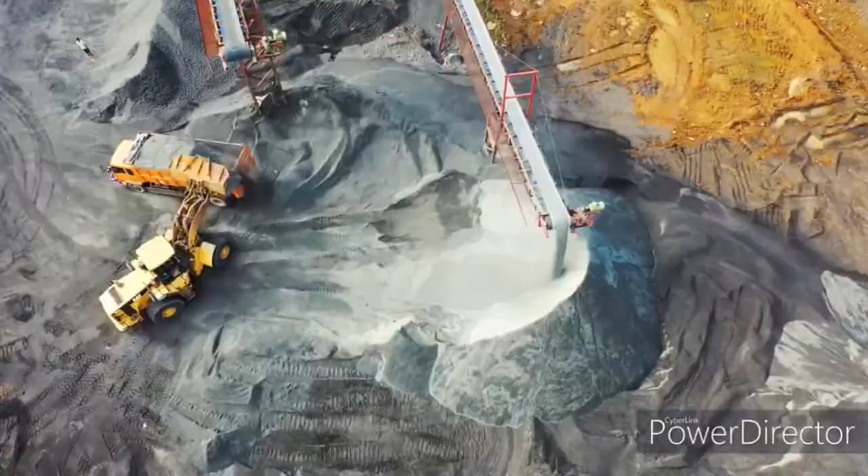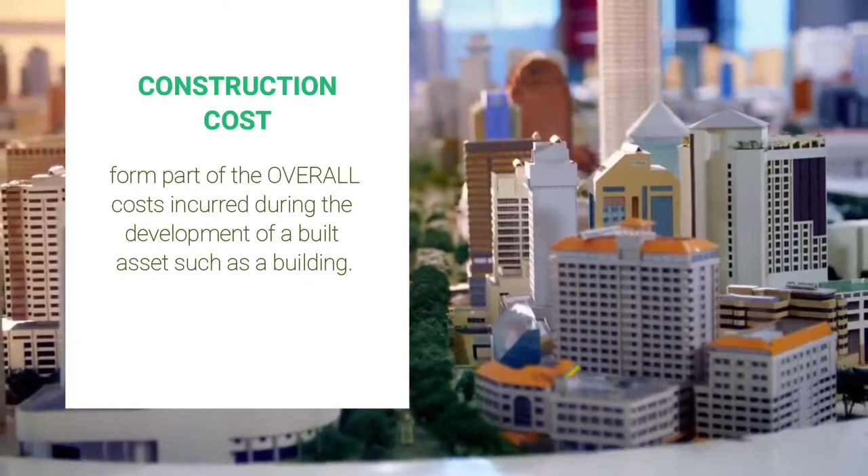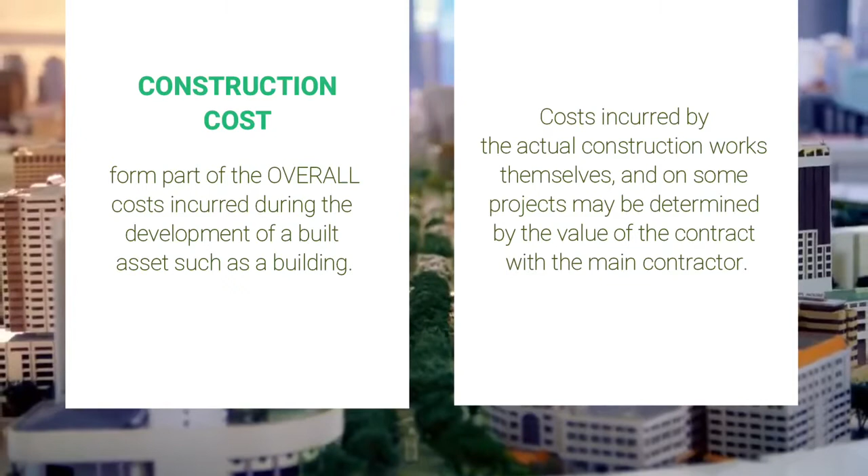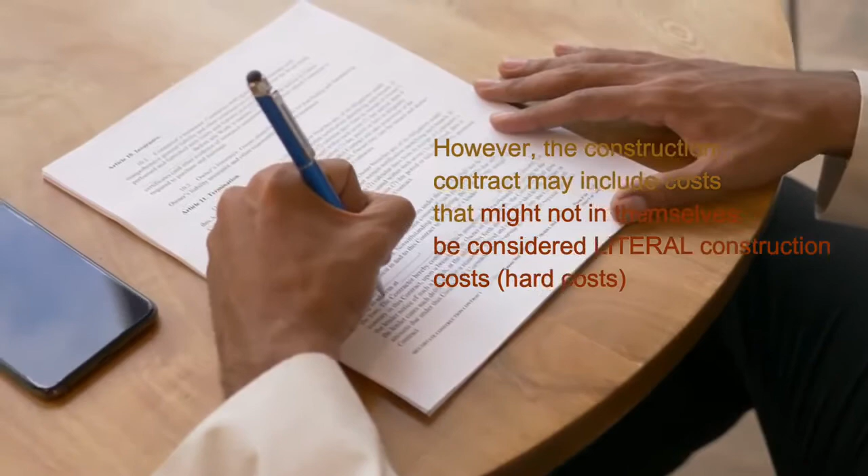Construction costs form part of the overall costs incurred during the development of a built asset such as a building. Those costs are incurred by the actual construction work themselves, and on some projects may be determined by the value of the contract with the main contractor. However, the construction contract may include costs that might not in themselves be considered literal construction costs, such as fees, profits, overheads, and so on.

Many projects will also include costs that is not possible to determine when the construction contract is awarded, such as prime cost sums and provisional sums. And there may be construction works that are awarded by the client outside of the main contract, such as fitting out the interior, minor alterations to the completed works, installation of equipment, and so on.

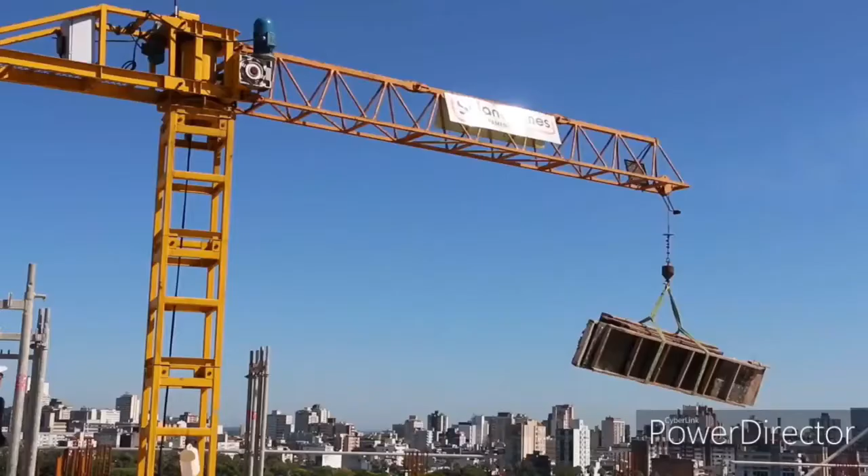In addition, the contract is likely to allow for the contract sum to be adjusted as a result, for example, of variations to the works, claims for loss and expense, or fluctuations. It is because of these unknowns that clients are advised to hold a contingency.

As a result, what is considered the actual construction cost of a project must be clearly defined and may not be finally determined until well after the actual construction works have been completed. This is true even if a contract is described as having a fixed price or guaranteed maximum price.

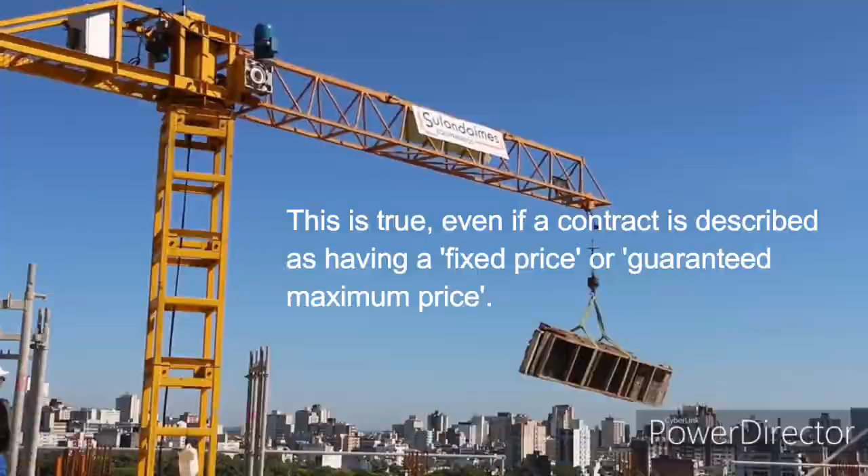Cost plans evolve through the life of the project, developing in detail and accuracy as more information becomes available about the nature of the design, and then actual prices are provided by suppliers.

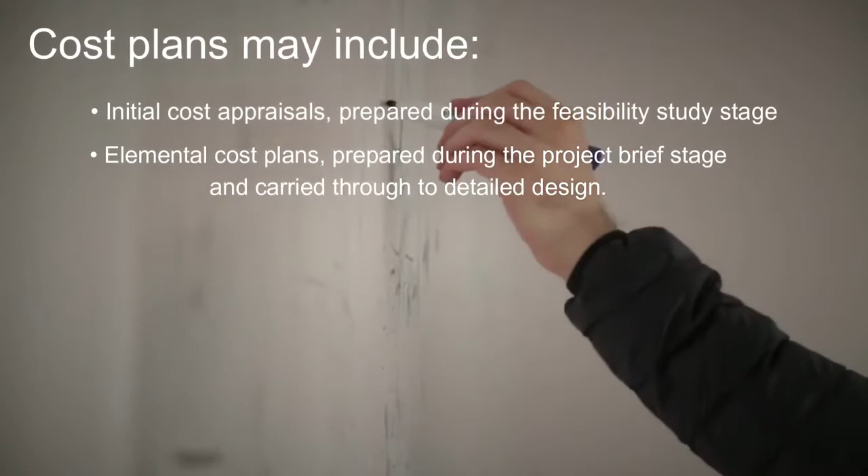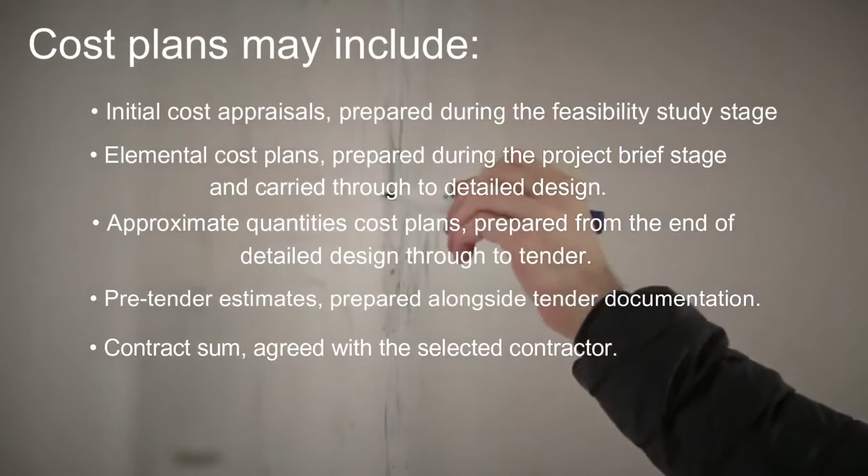Cost plans may include: first, initial cost appraisals prepared during the feasibility study stage; elemental cost plans prepared during the project brief stage and carried through to detailed design; approximate quantities cost plans prepared from the end of detailed design through to tender; pre-tender estimates prepared alongside tender documentation; contract sum agreed with the selected contractor; final account agreed once the construction works are completed.

Other than initial cost appraisals, these all relate to the construction cost of the project rather than wider project costs that the client might incur, which could include fees, equipment costs, furniture, the cost of moving staff, contracts outside of the main works, and so on.

Contingencies will tend to be highest in the early stages of the project, when there are the greatest number of possible risks, but can generally be reduced as better particulars about the project become available and some risks have passed or been overcome.

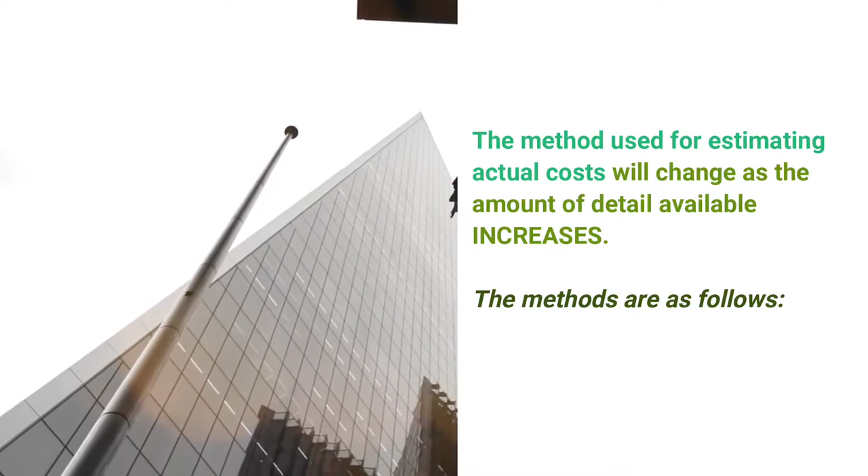Cost estimates. The method used for estimating actual cost will change as the amount of detail available increases.

Initial cost appraisals might simply break down the overall project budget based on information provided by the client, and an analysis of comparable projects in the experience of the cost consultant.

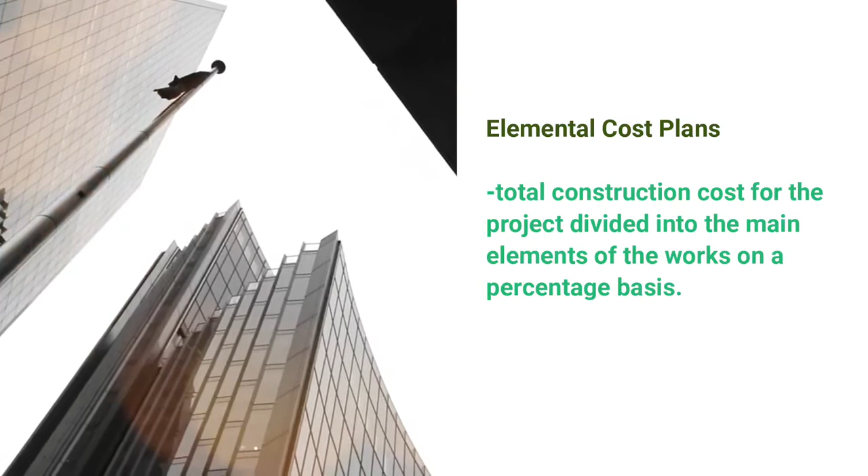Elemental cost plan may simply be the total construction cost for the project divided into the main elements of the works on a percentage basis.

The approximate quantities cost plan is a first attempt to measure defined quantities from drawings. It presents a more accurate picture of where costs are distributed. In particular, it draws the attention of the designer to those elements of the design that are standard and those that are not, and as a consequence may be more expensive.

The pre-tender estimate, or PTE, is the final estimate of the likely cost of the works that are described in completed tender documents. It provides a final comparison with the budget and, along with a cash flow estimate, enables the client to confirm that sufficient funds are available before committing to seeking tenders. It also gives a basis for assessing and comparing tenders when they are returned.

The contract sum provides the first actual confirmed price. Up to this point, all cost planning has been based on estimates.

A bill of quantities is issued to tendering contractors for them to prepare a price for carrying out the works. The bill of quantities assists tenderers in the calculation of construction costs for their tender, and it means all tendering contractors will be pricing the same quantities, rather than taking off quantities from the drawings and specification themselves.

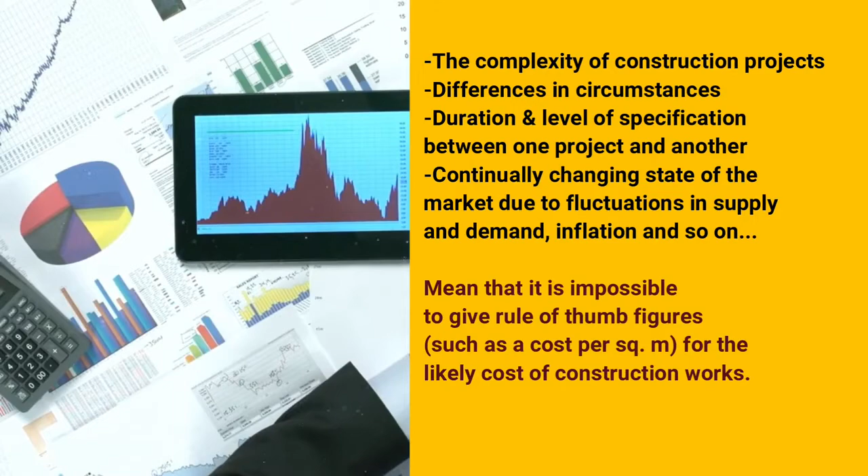Construction price and cost indices are produced for use in estimating, cost checking, and fee negotiation on public sector construction works. The complexity of construction projects, the differences in circumstances, duration, and level of specification between one project and another, and the continually changing state of the market due to fluctuation in supply and demand, inflation and so on, mean that it is impossible to give rule of thumb figures such as a cost per square meter for the likely cost of construction works.

Private sector organizations such as the Building Cost Information Service provide cost and price information to the construction industry to help estimate the likely cost of construction work.

Capital cost versus operational cost.

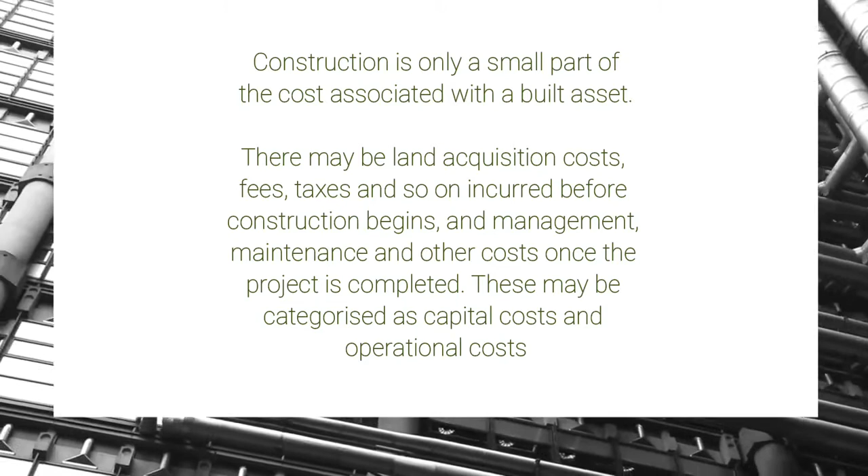Construction is only a small part of the cost associated with the built asset. There may be land acquisition cost, fees, taxes, and so on incurred before construction begins, and management, maintenance, and other costs once the project is completed. This may be categorized as capital cost and operational cost.

Capital costs are fixed, one-time expenses incurred on the purchase of land, buildings, construction, and equipment used in the production of goods or in the rendering of services. In other words, it is the total cost needed to bring a project to a commercially operable status and might include land or property acquisition, commissions, statutory fees, consultant fees directly associated with the development, materials, plant and equipment, labor, fixtures and fittings, project insurance, inflation, taxation and financing, and internal cost directly associated with the development.

Operational costs are the expenses which are related to the operation of a business or to the operation of a device, component, piece of equipment, or facility. They are the cost of resources used by an organization just to maintain its existence. They might include wages, utilities, maintenance and repairs, rent, sales, general and administrative expenses.

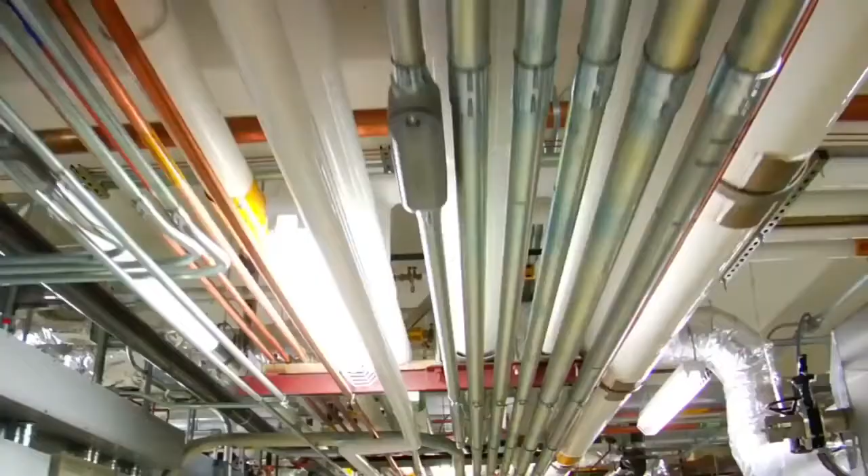Your drinking water system is made up of many assets, from pipes and pumps to meters and tanks. It costs money to construct, install, operate, maintain, repair, remove, and replace these assets. A lot of money. Most likely, you don't have all the money you need to do everything that should be done within your water system.

You should make smart choices about where you spend the money you do have available. Asset management can help with making the smart decisions. Asset management helps you determine how, where, and when to spend your limited money. It's about maintaining a desired level of service, that is what you want to provide to your customer, at the lowest appropriate life cycle cost.

Life cycle cost means total cost of ownership of an asset: the purchase price, the cost of operating and maintaining it, refurbishment, and disposal. But figuring out life cycle costs can get tricky. Sometimes, assets that are cheaper to buy end up costing more over time, especially if the asset uses energy.

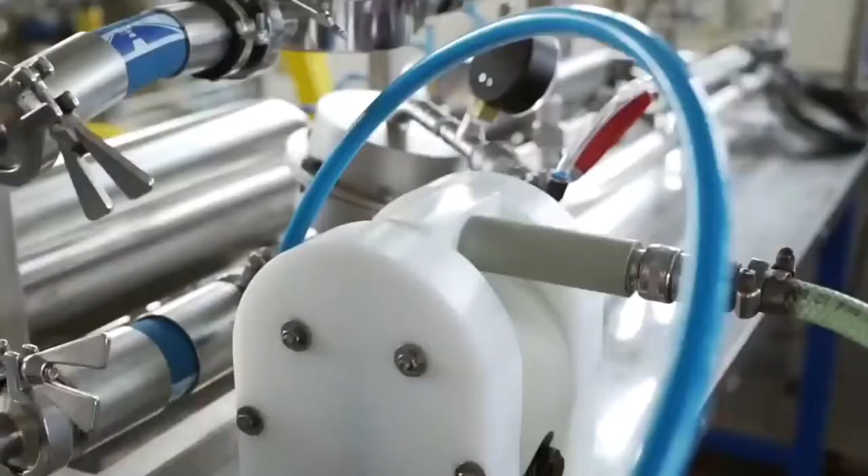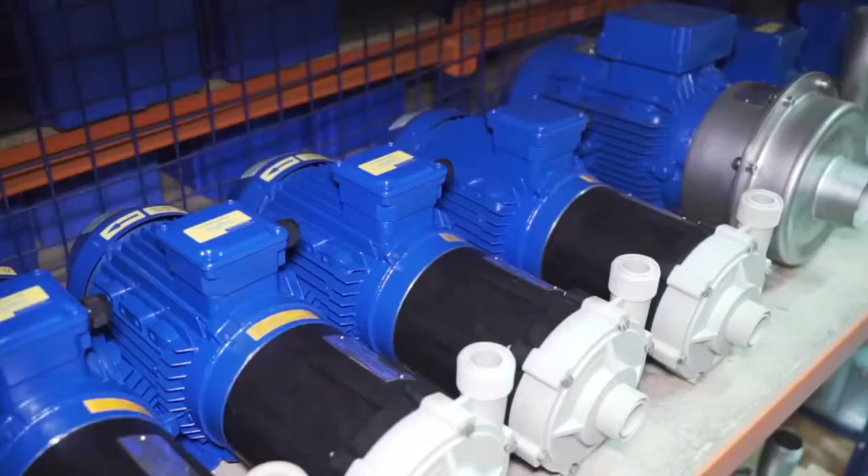Let's imagine you're buying a new pump. There are lots of options out there. All pumps have the appropriate size and power, and seem to do the same job, which is pump water. So why not just buy the cheapest one and save money for something else?

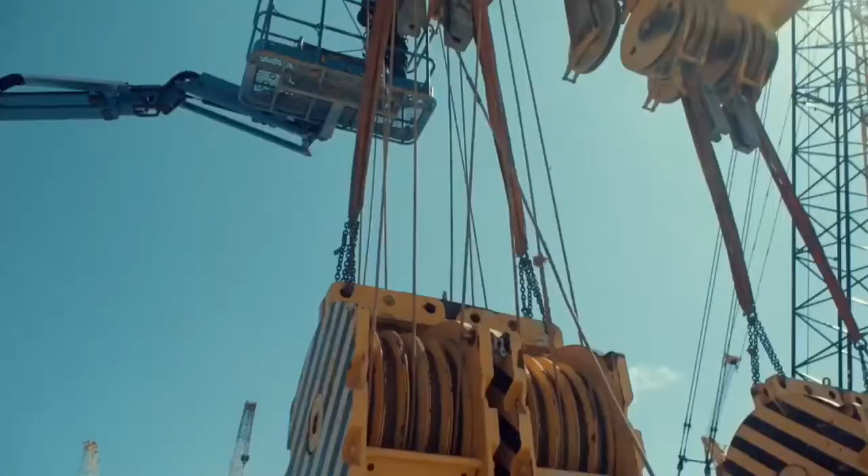Whole life costs consider all costs associated with the life of a building, from inception to construction, occupation and operation, and even ultimate disposal.

This is considered a better way of assessing value for money than construction costs, which can result in lower short-term costs but higher ongoing costs through the life of the building. This can also apply to things such as design phase, where saving money on fees at the beginning of a project can be outweighed by very much higher ongoing costs through construction and occupation.